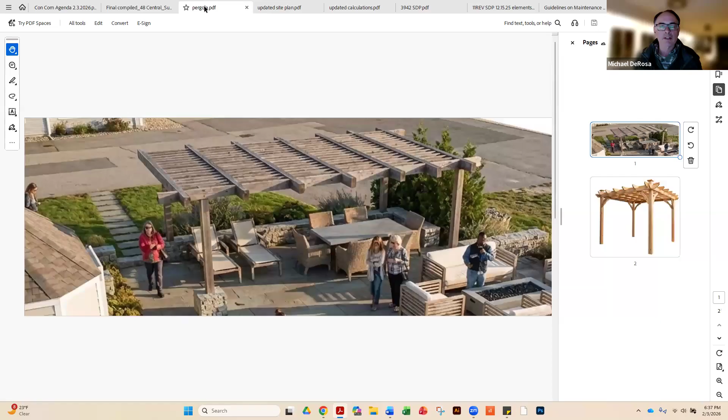The pergola was one of the issues, and the commission asked if we could do a rendering. Matt was good enough to do that. This is what it's going to look like. I think he put it on a photograph of the actual site, so you can see it fit right in. Bluestone patio with at least a 1/4 inch spacing between the patio blocks, and it's going to be rice stone, not that other material we talked about earlier. It won't have a solid roof on it, just a pergola, looking basically like that, with columns on blocks, and this is the structure of it.

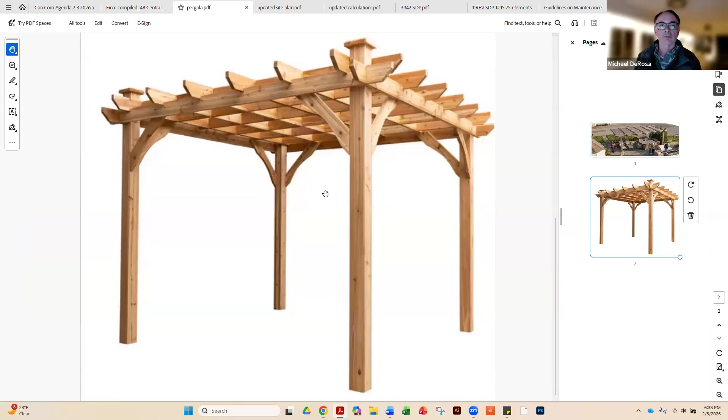For the pervious patio, the first edition of the memo from January 23rd had us providing more information on the nitro joint sand. Since writing this, we've decided to just go with the rice stone, which is loose 1/4 inch rice stone, very porous. There won't be any joint sand or other product in between it, it'll just be stone, at least 1/4 inch.

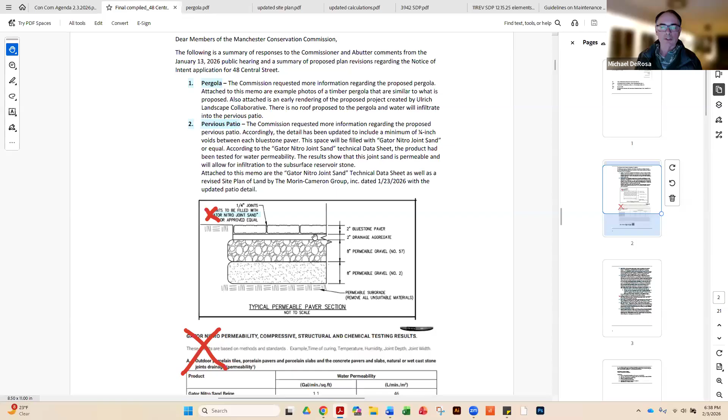So all that doesn't apply anymore. Also, we heard from the commission about the artificial turf, and we went back. We thought initially it was a good idea, at least in concept, but I think it was Olga who brought up the point that in a storm or tidal situation, how well is that turf actually anchored, and are we going to be dispersing microplastics into the ocean and into the harbor? We went back and looked at that, and it doesn't hold up. I like it in concept, but as a practical matter, we're not there technologically yet.

So we're just going back to natural grass, and it'll just be natural grass in that area. We've actually expanded the square footage a little bit. When I get to the plan, I'll show you that. So no more artificial turf, it'll just be natural grass.

The generator pad, we talked with Nate at DPW, and he sent us an email, which we have in the supplemental information. Basically, they're in agreement with leaving it where it is, as long as there's access to the sewer manhole, which there absolutely will be. And if for any reason they need to replace the sewer in the footprint of the easement, it'll be at the cost of the owner to move that. The Bedells are fully in agreement with that.

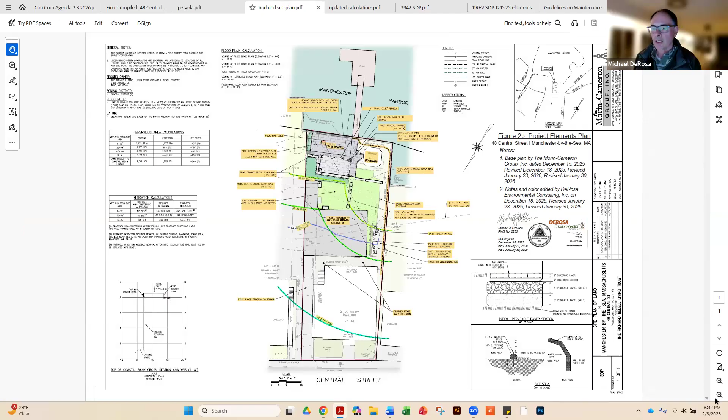Let me show you, I showed you the pergola. So this is the site plan. I just want to show you the detail. We changed the note here that says the quarter inch joints are to be filled with rice stone, so that's clear on the plan. It's not going to be anything but rice stone there.

And then these are the three new seating blocks, really to protect against cars backing up in there. We still left room for the snow plows to plow the snow onto the lawn area. So we've taken care of that.

We talked about the generator pad. We were thinking maybe we could move it up into here, but it can't be closer — I think it's 5 feet. Letitia has the setback numbers, but it just makes sense if Nate's okay with it being where it is, then that would be the best thing to do.

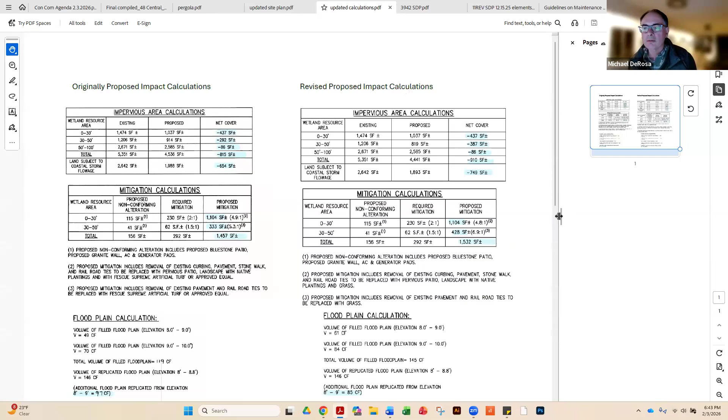What else? The change in numbers — Evan put a summary of the original and proposed impacts versus the revised. I'll zoom in so you can see it better. We still show a negative 437 square feet, so a reduction in the 0 to 30. We've got more of a reduction, going from 292 to 387 in the 30 to 50, the no-build zone. We have the same reduction, 86 square feet of less impervious surface in the outer 100.

Could you just point out where the impact was for the new granite block, the reduction in net cover? Let's see where they are, let's look at the plan. So these are in the 30 to 50. What we did was enlarge the lawn area to help cover for that. That's why we're still seeing a reduction.

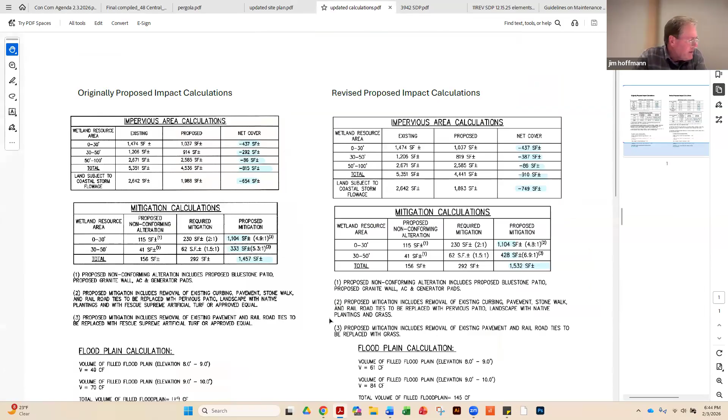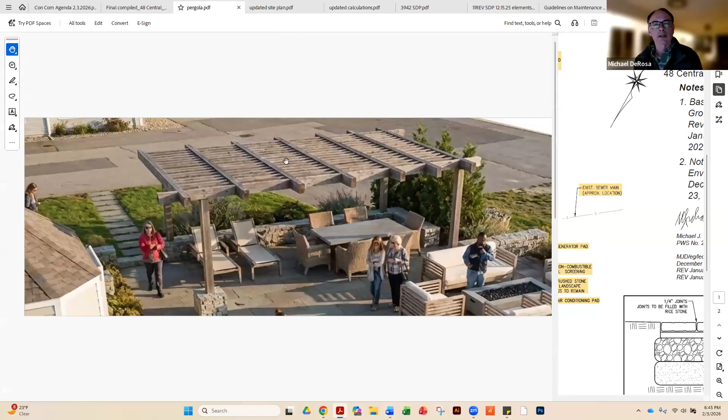In the parentheses to be removed, does that relate to the fire table or the patio? That's the deck, the wooden patio that's there now. So the deck will go away, and the pergola will be going in right where the bluestone patio is, with the reservoir stone underneath.

Yep. And I think that's it. The only thing was, because of those seating blocks in the floodplain, we went from creating 97 cubic feet to creating 85 cubic feet of storage. So we're still creating storage, but it's a few gallons less. It's nominal.

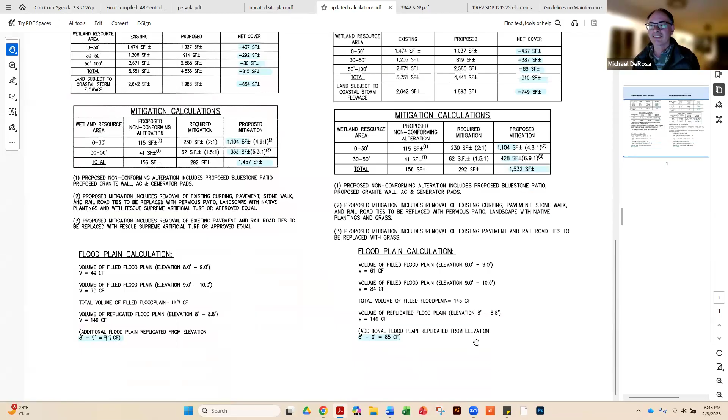So that's all I had. I don't know if Matt or Letitia wanted to add anything before we take questions. Not by me. I think the only thing I'd say is the pergola is conceptual at this point. The renderings and images Mike showed you just give an idea of what it's going to look like. When the time comes, we could provide detailed drawings if that's helpful. But the idea is it's an open structure, basically.

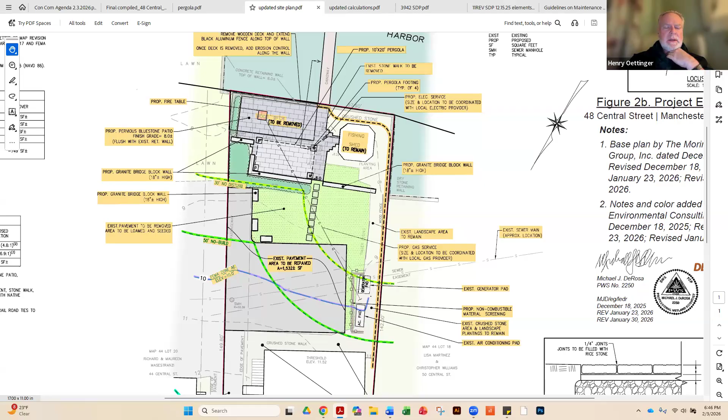Are there questions from the commission? I'll just make a comment. Matt, the time has come for the pergola design, because you will need to go before Historic Commission for that design, and if you don't have it, that's going to be very difficult to do. Yeah, we're also going to need that for a building permit, I'm sure.

Just on that point, Matt, has this property been before the Historic District Commission for the work proposed in the rear of the property? It has not for this project that's before you. Okay. Generally, we are kind of the last after other boards and commissions have granted their approvals, so we may choose to remain last and await your determination from the Historic District Commission.

I had another question, Henry, I don't mean to interrupt. Are you done? Oh, yep. Thank you. Is there currently gas service to the area where you propose a gas fire pit?

Let's see. Put the plan back up again. Are you running a new line? I believe we're running a new line. I think there's currently electric that goes down to the dock, but gas only runs to the generator and would probably be extended from there.

That's correct. I have the same kinds of concerns about putting a new gas fixture right on the coastal bank that I do about putting artificial turf on the coastal bank. Seems to me not something we want to encourage, and as a precedent it might be a step in the wrong direction.

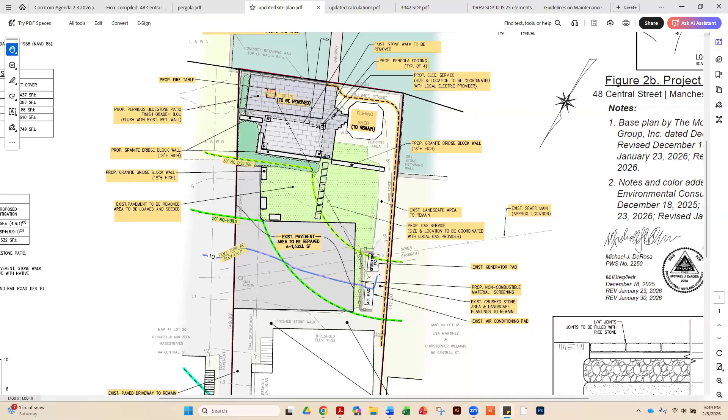That's all I have. Anybody else? David, your hand is up. Yes, I'd like to say I think the commissioners, neighbors, and owners have worked together beautifully on this project. It has taken a long time, and it's evolved considerably from the original proposal. I like this finished project. I'm in favor of it. So I will support this. Thank you, good to know.

If there are no further comments, wait, Gordon has his hand up. Gordon, go ahead. The thing I've been thinking over since our last meeting, and still struggling with, is putting hardscape like this right on the water where we know there's flooding happening on a regular basis. I can't even get my hardscape to stay put on high and dry land. I'm really worried this is all going to get eroded and wash into the harbor, and I feel like that's dangerous for the resource.

And I don't know if the applicant or Mike, if you have any experience with hardscape in this sort of coastal location, or if you have any thoughts about that. I just feel like all this crushed stone underneath is really subject to being eroded away as we get water action there. I'd be more concerned if it was an earthen coastal bank, but it's a vertical wall, and it's been there a long, long time. So that's going to protect everything behind it, and it's not above the wall, it's below the wall.

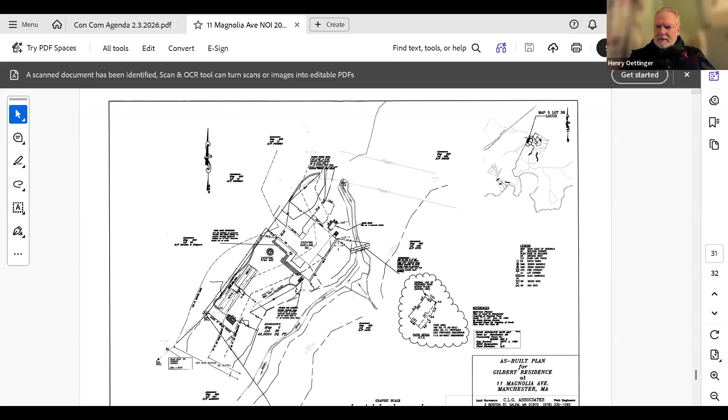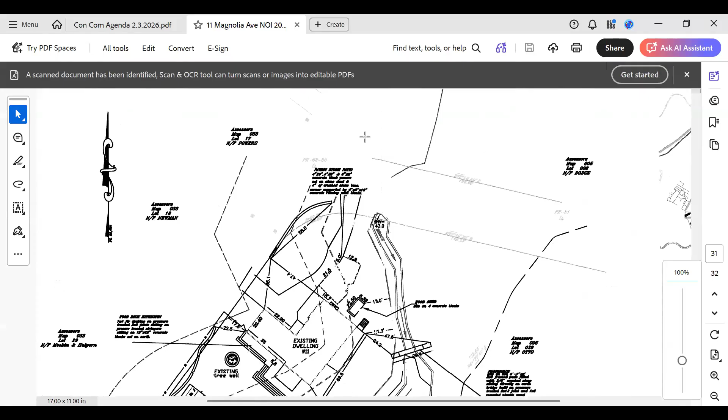What? Oh, I'm curious about the quadrilateral structures that are on the outside of the shed. What are they? I'm not sure what you mean. On the left side of the shed or the right side? The front has a few and the left has a few.

We need to hold that on. Having technical difficulties. Just give me a second, please.

Yes, are they proud of the siding? Yeah, they're trapezoidal. The whole structure is trapezoidal, so they stick out cocked at an angle, 6 inches down, tapering to a couple of inches. All right, thank you. Okay.

So back to the question, can we be sure that this has complied with the plans that we approved in the order of conditions? This is the notice of intent that I found for this project. It was hard finding.

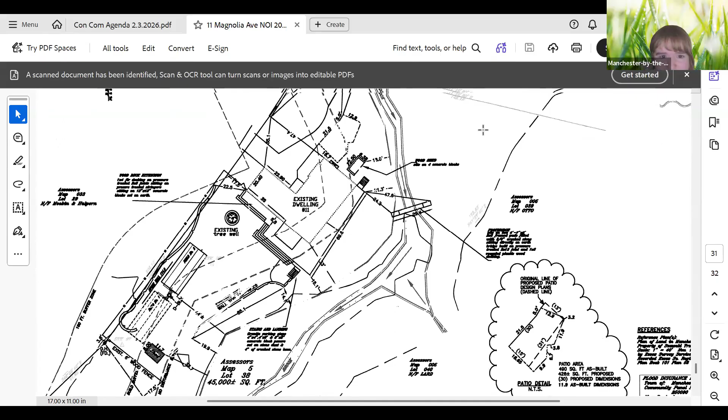Sorry, can you hold that still for a second? Oh, show that? I'm sorry, it's just hopping around. I apologize.

That should be at the bottom. So the shed would be at the bottom there somewhere? I'm sorry, I don't see it. Yeah, I'm not seeing it. I had a hard time finding documents for this project, to be honest with you.

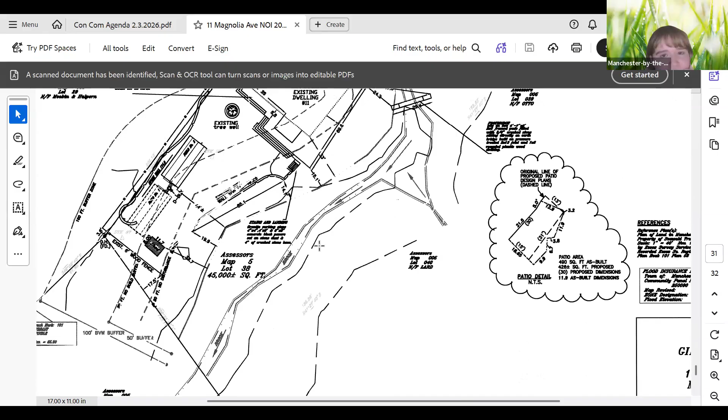As I'm sure Gary knows, to issue a certificate of compliance, we need some evidence that the structure as built conforms to the plans as approved. Normally that would be an as-built plan and a letter from an engineer. For a project of this small scale, personally, I'm willing to accept something less formal, but we do need something.

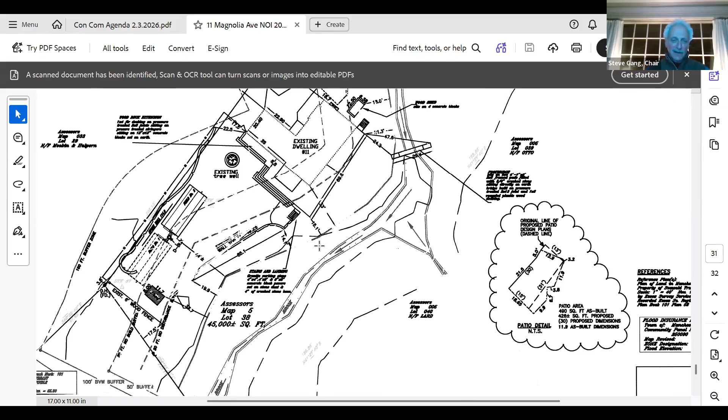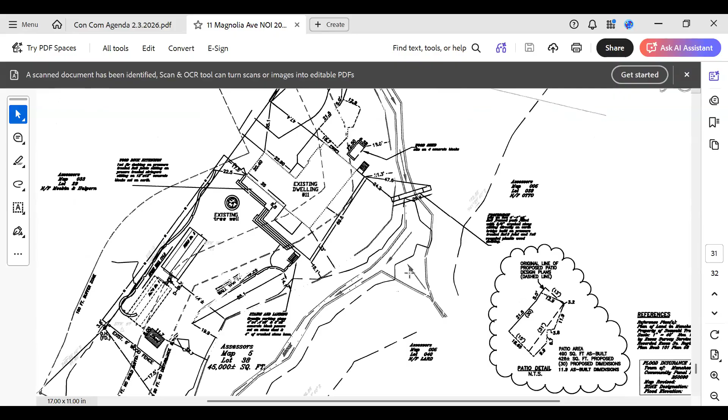The plan you're showing here looks like the existing conditions plan, but I also submitted to you the proposed plan, and you do have it in your records. I'm certain of that. Okay, and do you have an as-built? It's a 12 foot by 30 foot structure, and it was built exactly 12 feet by 30 feet. I could send a letter to that effect.

That might do it. The as-built plan's no different than the proposed plan. Okay, does anybody feel the need for anything more formal than a letter asserting that the dimensions are the same as proposed? No. Well, we did have a proposed plan. I remember that. Me too.

I can send you fresh copies of that. I've got all those documents. I think I have them digital too. Yeah, that would be helpful. It's just hard to find things before my time here.

I apologize, I only heard about this meeting about an hour ago, and I'm on the side of the road. I have no access to my laptop to pull anything up, so I can send that. Yeah, that would be good, that would be very useful. Thank you, Gary. I went to great pains to make sure it was exactly 12 feet wide, sorry about the short notice.

And has it worked out functionally as you want? It's not big enough, but I'll make it work. Okay.

Gary, did you receive an order of conditions from the commission? I believe so, yes, I received something in the mail. Okay, if you have that, if you could forward that to Bethany. That may or may not have the plan attached to it, so we'll need that as well. Yeah, the OOC and proposed plans. Okay, good, thank you.

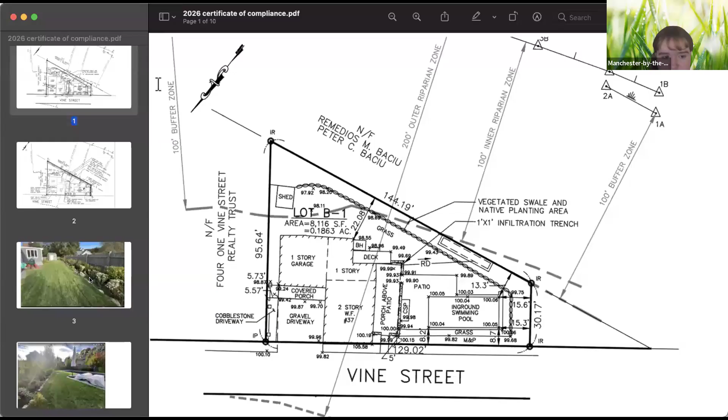I took some pictures before the snow, if I could share those -- that might be helpful. You should be able to. Go ahead, I'm somewhat technologically challenged here. There's like a green button that you hit to share. Can you see this? Yes.

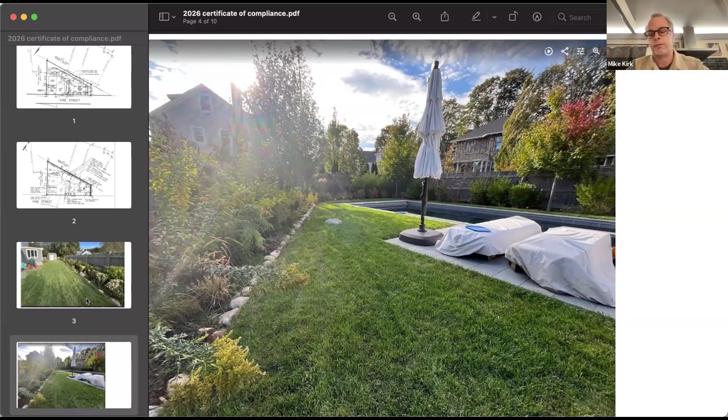So this is what was proposed to be a 5-foot vegetated swale with native plantings. This is looking southeast, and then if you're looking northwest you can see we brought in some trees -- there's 3 red maple trees, a couple other trees, and various viburnums and witch hazel. I'll go back to the other picture -- I can show you from the second floor looking south, to give you an idea of the size of the plantings that went in. Here's another view of some red maples. I don't know what these guys are called.

That's impressive, nursery stock, large scale stuff. I found out that plants are not inexpensive -- I've determined that.

So yeah, I can stop sharing if you'd like. When were these taken? These were taken at the end of this summer, probably August or September of 2025. Plantings went in the year before, in '24, before we even really started construction. The first thing he did, on recommendation based on the 2 years, was dig the 5-foot vegetated swale, and we started throwing stuff in right away because that was his recommendation to get started on that.

Good for you. Any other questions? Is the commission ready to vote?

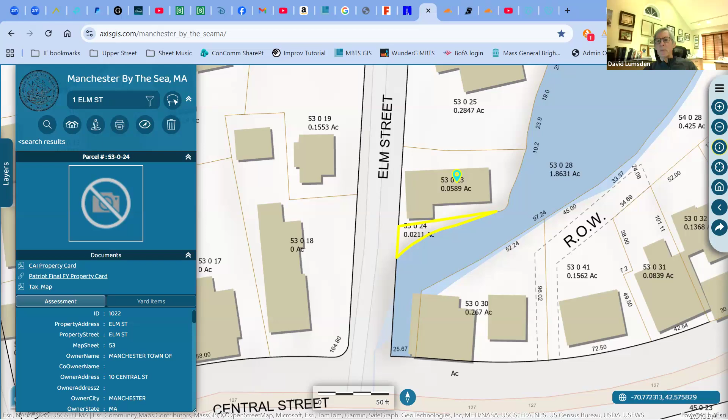Henry, that was a nice summary of what was a very strange explanation. And there wasn't a whole lot of questions from the select board about Mark's proposal for handling this. But I think, if I'm not mistaken, Henry, this is not our purview. If the town or the owner wants to change title to the property, unless some changes are made on the property, it's not Conservation Commission's business. Am I mistaken in that regard?

I don't think so, David, but we can opine on what the town should do with this property. Well, we could, but we could do that on a lot of things - it's not under our jurisdiction. There's opining and then there's consensus. We have a general mandate here to recommend what properties the town owns that aren't currently protected be put under protection. That requires a vote of town meeting. Right, okay, they're going to town meeting anyway. Then that would be justification for the Conservation Commission to be involved. That's why I was weighing the tiny size of this.

It just reminds me, we have a couple of other kind of splinter parcels. We have that little one that's next to Gary Gilbert's house across the street, on the corner of Magnolia and whatever that is. It's probably five times the size of this, but it's still a very small piece of property, essentially unusable. Yeah, it's hard to imagine what we would do with this.

Is it in the town's best interest to offload this property so we don't have to maintain the wall? That's a great question. Maybe, I don't know. It's really fascinating, it'd be interesting to just go look at the state of the wall.

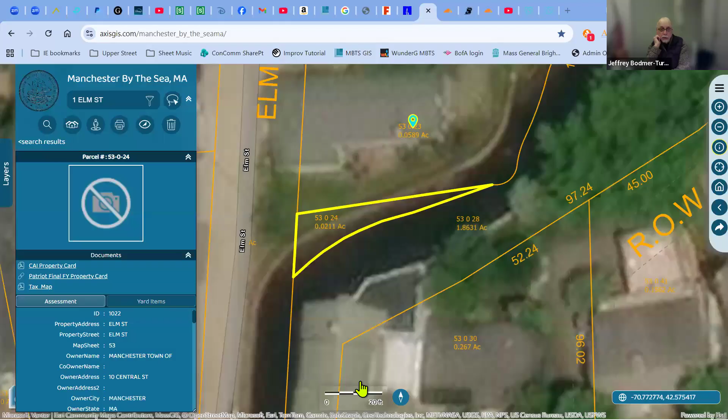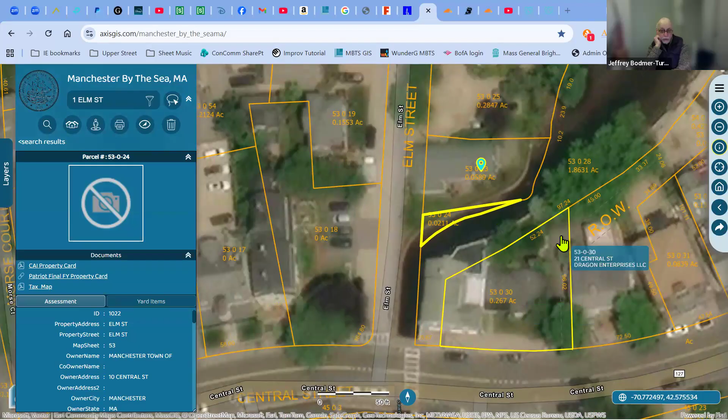Oh, interesting, okay. And if you look at the map, I don't want to drag you back into that discussion. Yeah, that's fine, if you look at the map and look at the second overlay, you can see that where it's still a stream, you do get ownership to the midline. Yes, so it might be only a few feet of land, maybe a third of it, like 300 square feet of land. Well, let's bring our measuring tapes. Let's not waste a lot of energy on 300 square feet of land. Yeah, you need a survey.

Yeah, right. That's going to cost you more than the conveyance - the value of the land.

I have a question about putting permanent structures near the water - what's there now is a parking lot. As a source of pollutants going into the coastal bank and the harbor, I can't think of anything much worse than a whole bunch of cars.

It also reminded me - has anybody gone into Harrigan's or the physical therapist on 40 Beach Street in the last week? I was there today. There's a half an inch of rock salt on the sidewalk and the less traveled parking area, not the thoroughfare part, but the parking area. I'm not sure it's sodium chloride, but it certainly looks like it.

You mean the parking lot that's about 100 yards from the harbor? Yeah, that one, right-hand side going up Elm Street - Duncan's lot. No, I was thinking of the one at 40 Beach, which is right across from Captain Dusty's, Harrigan's, Bravo by the Sea, those things.